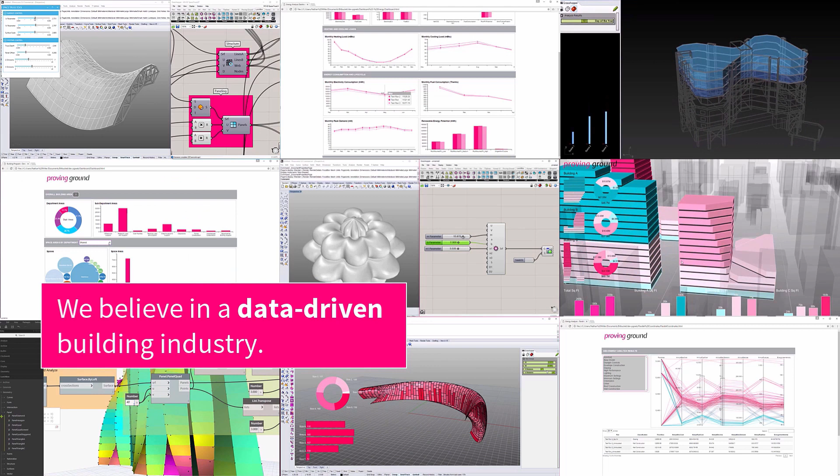This manifests itself through a number of different ways with which we engage with the building industry. One of the bigger ideas here is that being data driven is more than just having access to data or leveraging specific technical workflows. It really speaks to having a methodology and promoting cultural shifts that allow us to think about things through evidence-based workflows and decision-making processes based on the use of data.

And I think that's especially relevant when we think about our topic today with business intelligence. Business intelligence is in many ways a layer on top of various data frameworks that can be used to help drive decisions and actions through insightful uses of analysis and visualization of the data that we have.

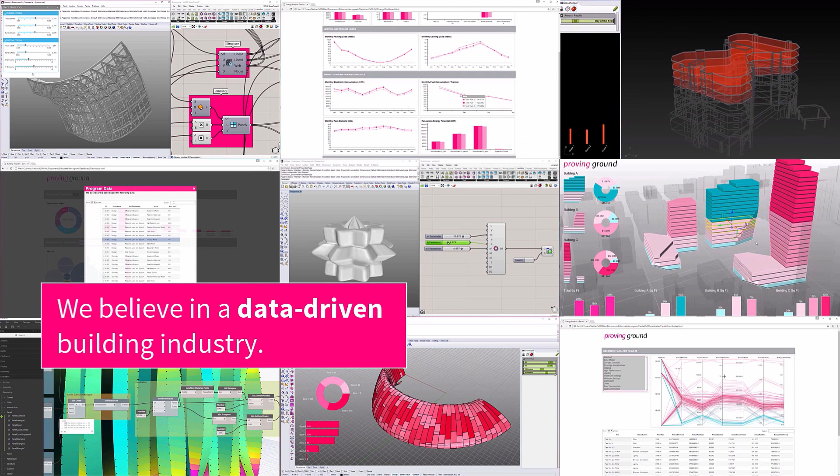But what I thought I would start with is just maybe a bit of a set of observations on data in the world of construction and building and design. It's something that I feel a lot of people talk about in a very abstract sense.

One of the things that we hear from our clients and customers is, hey, we have a lot of data, what can we do with it? Or there might be passing references to, hey, we're using data for X and data for Y. And there is sometimes less of a dialogue about the direct engagement of how the specifics of how data can be put to use. And I think there's a number of reasons for that.

A lot of it has to do with the complexity of our industry. Any given project in the building design and construction industry has multiple sources of data spread across many different forms of representation. Any given project may be dealing with dozens, sometimes hundreds of different data sources at any given point in time. And our tools today are set up to manage data in very localized circumstances.

So when you're building a Revit file, you are in effect authoring data using building information modeling. When you run an analysis of your building using daylight simulation, you're using available data about climate and simulated data to make predictive assumptions of how your building may perform relative to certain criteria. And there's also just the idea of a plan, or a spreadsheet of any kind. These are different forms of data that we're dealing with.

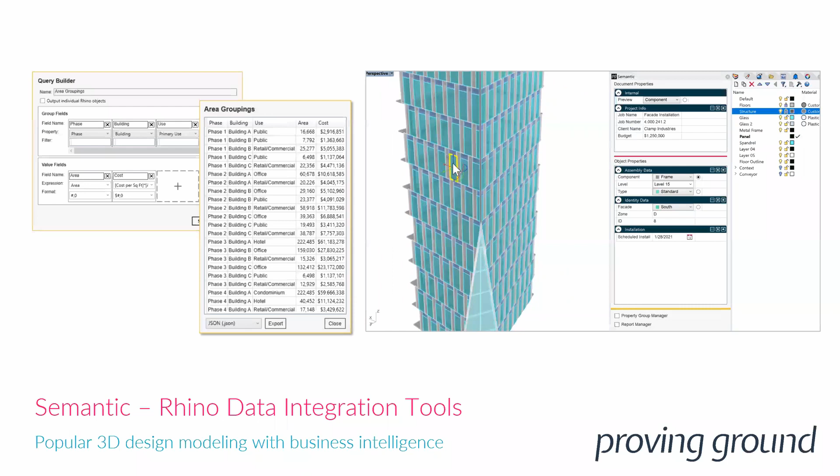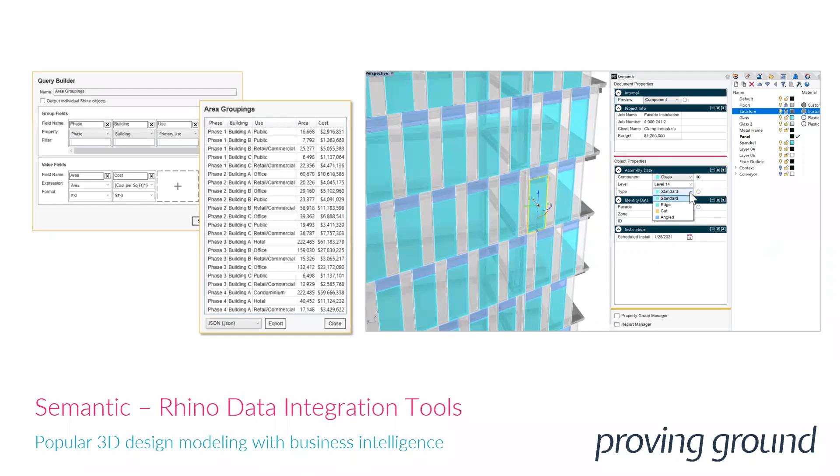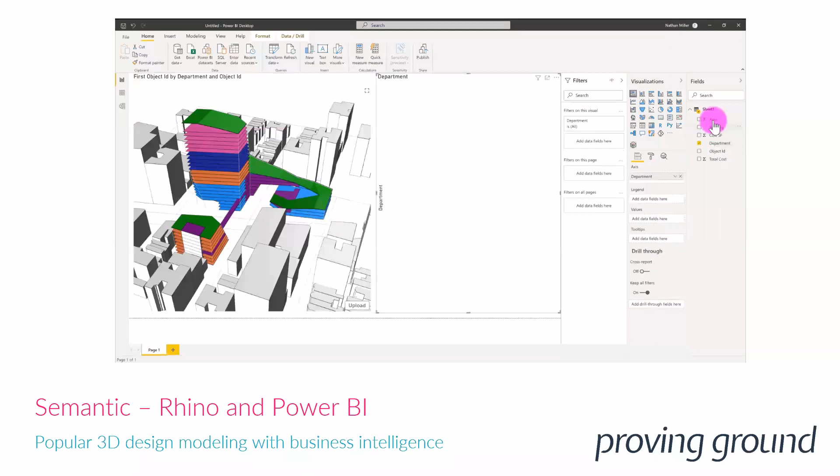Where this becomes interesting for us in the context of business intelligence is that all of a sudden we're thinking about the Rhino file as more than just a model to produce a given deliverable, but thinking about how that model can be used for different forms of analytical and communication purposes. So what you're seeing here is the Power BI environment, using a set of three-dimensional visualization tools, as well as the more out-of-the-box visualization tools by way of pie charts and bar charts.

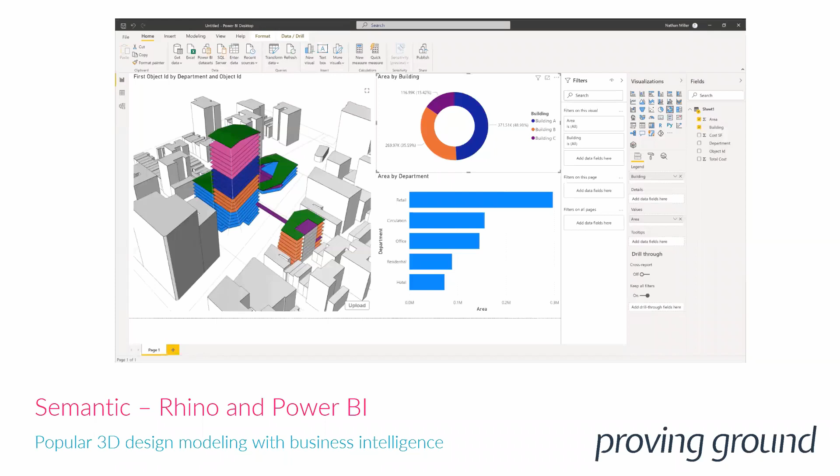We can develop an interactive three-dimensional dashboard that communicates metrics we're interested in understanding, and we're able to do so without having to write a single line of code or HTML to get to the end result. We think that's a pretty powerful idea, the idea that you could go from a conventional modeling paradigm, just modeling surfaces in Rhino, maybe applying some attributes, to then taking the information, tying it into a business intelligence environment, bringing in other data sources as well, composing a dashboard, and then getting to a state where you have something you can share with other stakeholders.

With a very low barrier to entry, in the space of technology, something like that Rhino model that is just a set of surfaces might be transformed and composed into a report that looks like this, where you have a three-dimensional breakdown of surface areas and building program. You can start to get an understanding of different metrics that may be impacting the project, like cost per square foot, or area of building, potential revenue generation.

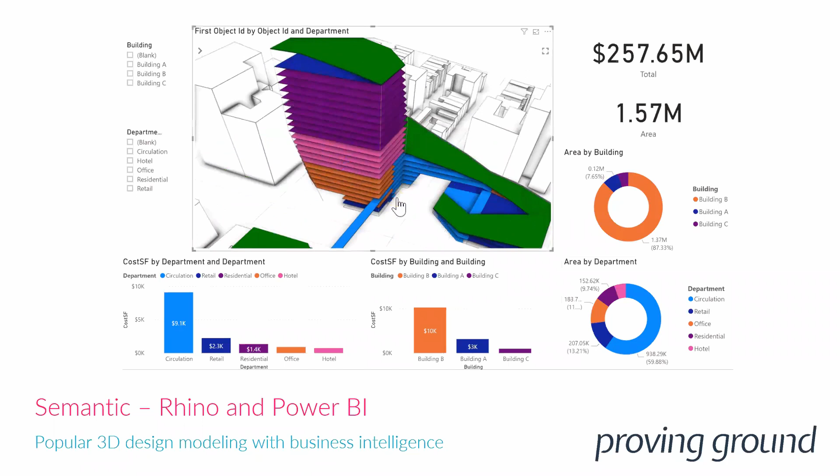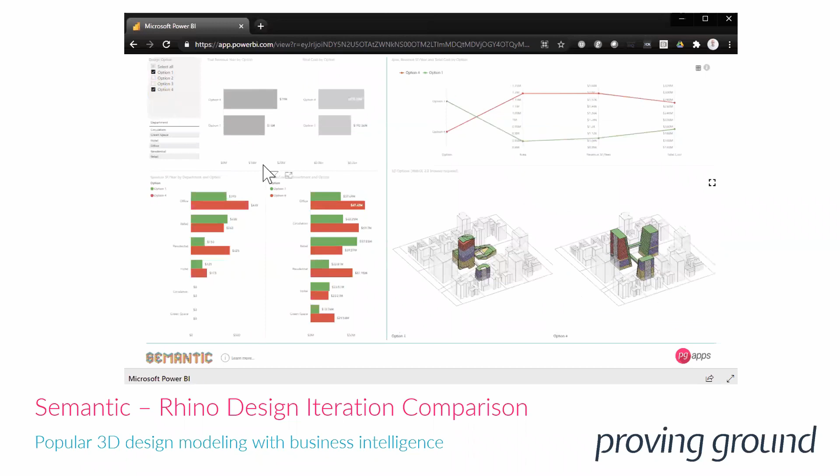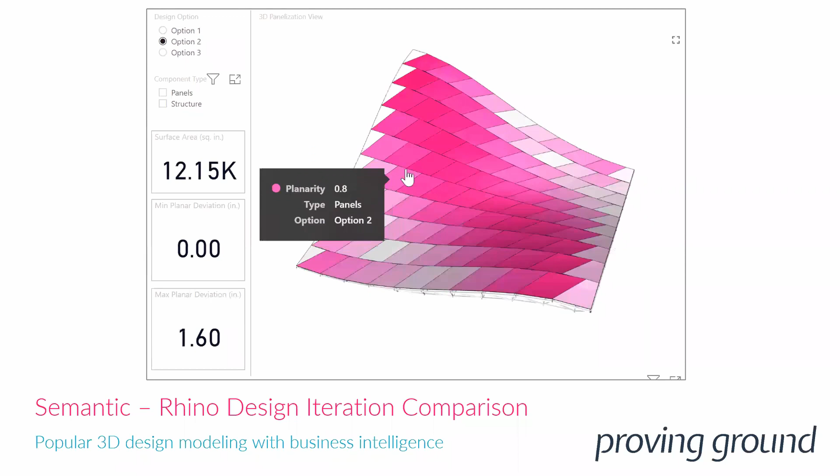We've seen this type of thing applied in the space of more fabrication-level building systems, complex geometry. This is a sketch I put together for these types of presentations that looks at a parametric truss structure, with three options generated, color gradients suggestive of panel flatness. We're able to get an understanding of the composition of these elements, again in a web-viewable formatted dashboard that tells that specific story.

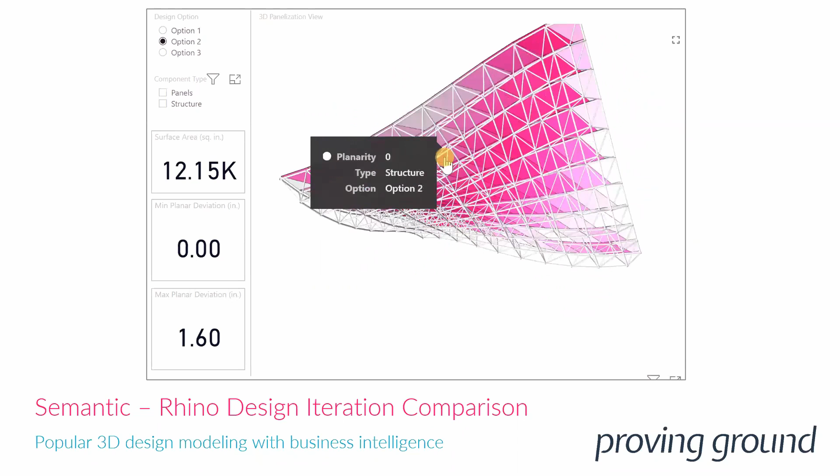There's other kind of applications for this that maybe even go beyond our particular domain and expertise. And those that know me well know that I'm a huge nerd, and I have a hobby in the space of 3D printing.

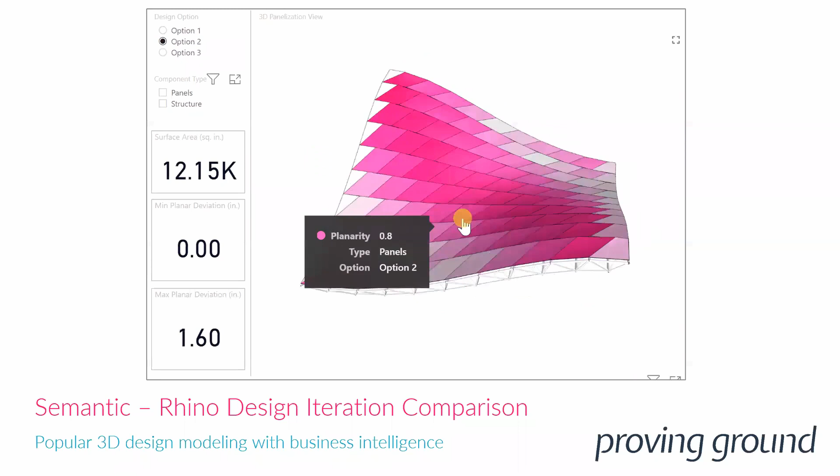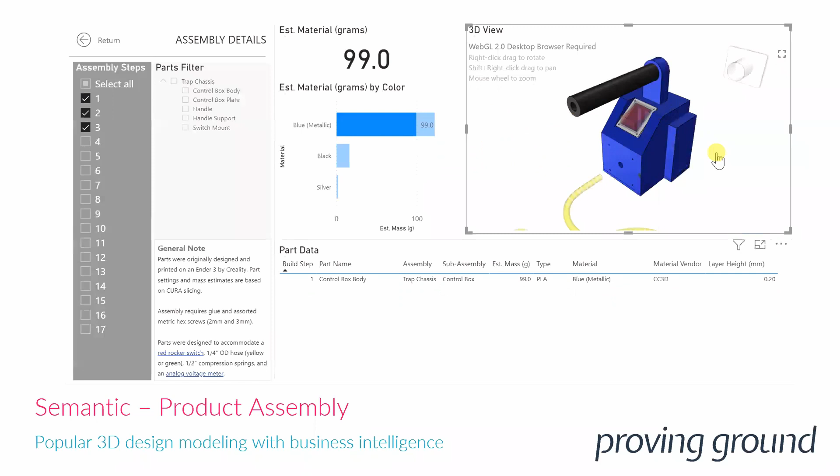So for anyone out there familiar with prop making and classic movies from the 80s, you may recognize this particular toy from an 80s movie. I certainly had this toy as a kid growing up. This is the Ghost Trap from the famous Ghostbusters franchise. I'm really into 3D printing, and I make stuff for myself and my kid all the time.

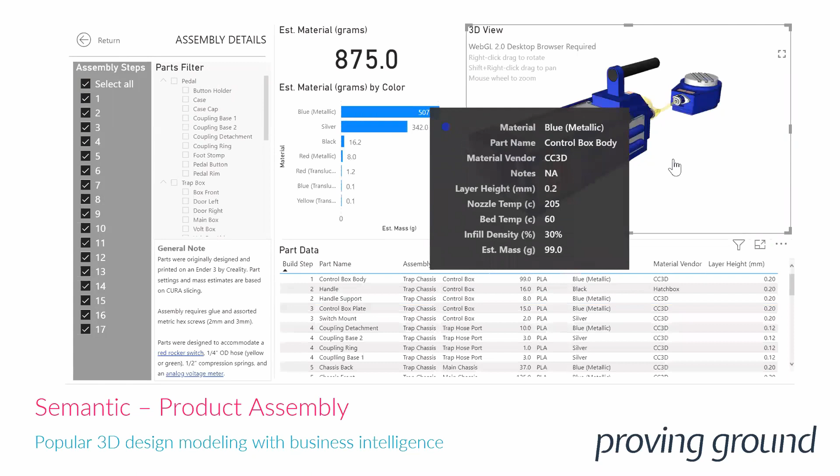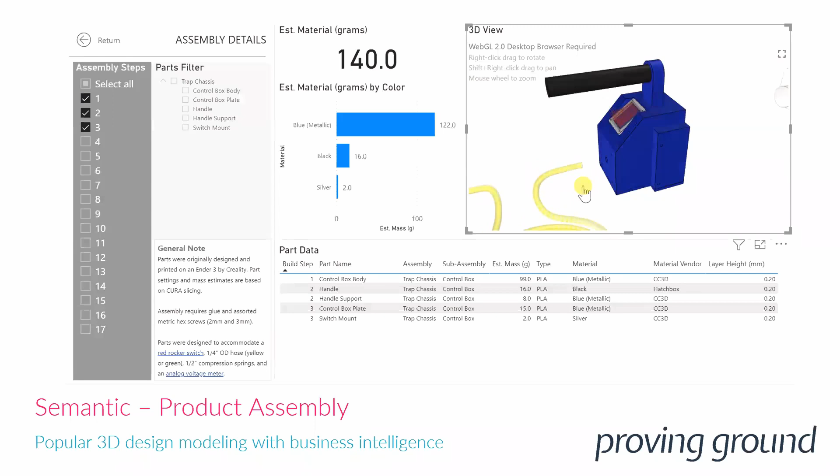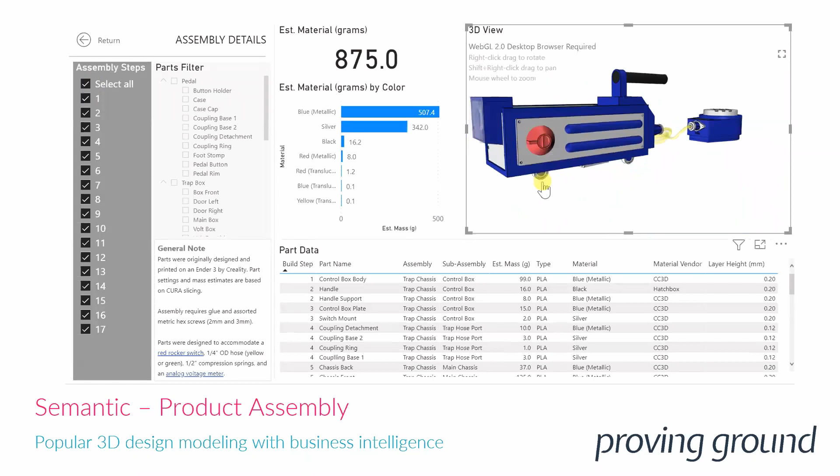This is a 3D printable set of files organized in Power BI, showing breakdowns of component parts and assemblies, as well as information about the particular 3D printable material being used, the layer heights being used by the 3D printer, and then a set of instructional steps that can guide you through the composition and build of one of these props. Taking us away from architecture for a minute, but showing something suggestive of potential workflows and uses here at a conceptual level.

So I wanted to now step into the space of, if that's the conceptual realm or early stage development, or the freeform geometry realm of 3D modeling and representation, what we can also observe in the building industry is that one of the central sources of data that we work with day in and day out as professionals is building information modeling. So as professionals, based even across different platforms and tools, you are authoring and composing more likely than not some aspect of BIM.

You might be in Revit doing planning, you might be in a place like Tekla doing steel detailing, you might be in ArchiCAD, et cetera. Revit at this point in time is obviously one of those tools that is extremely widely adopted, especially in North America. We wanted to really look at ways with which we could equip users of Revit with ways of harvesting their information, both at a data level, but then also at a 2D and 3D level, and have that data represented in a business intelligence environment like Power BI.

So the workflow that we have here is mostly about how do you translate a Revit file into a data source. Power BI isn't going to read your Revit file directly, right? You have to get the data out in a way that a tool like Power BI can connect to it. There's an aspect of this where we've invested quite a bit of time and energy into creating harvesters that let us take these industry file formats and put them into open database modes of representation.

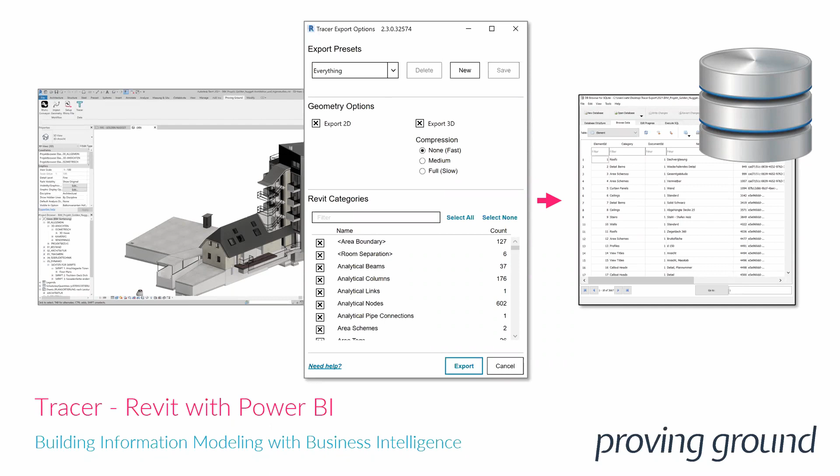So one of the things that Tracer out of the box does with this toolkit is it takes your Revit document and composes an SQLite database. Using open database connectivity paradigms with Power BI, you can connect to that database and read in different attributes about your project, about the geometry, about various parameters, and so on.

So what that results in is this ability to connect into a building information model as you would an Excel file, or a CSV or JSON file in Power BI. Using the drag and drop interface and visualization tools we've authored, we can display the information right out of the data source and have it dynamically generated within a dashboard environment.

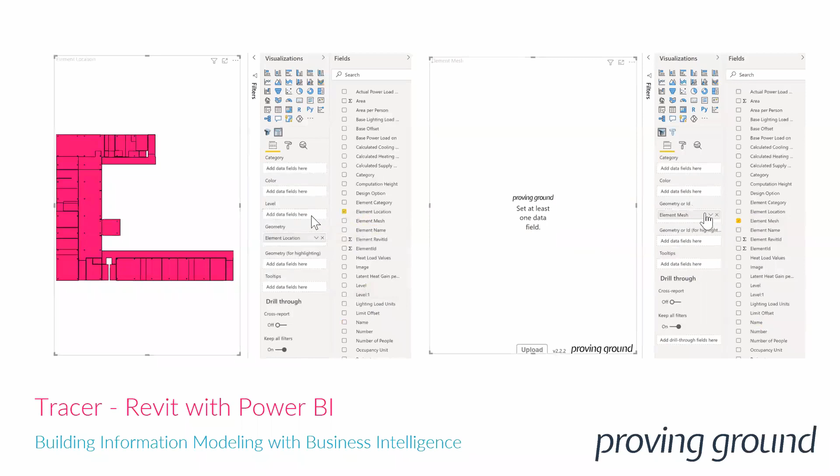There are two visuals here. One is a two-dimensional vectorized visual looking at spatial boundary information, generating a view through the drag and drop allocation of fields. Then using the same data source, we're dragging and dropping three-dimensional mesh geometry onto the dashboard as well.

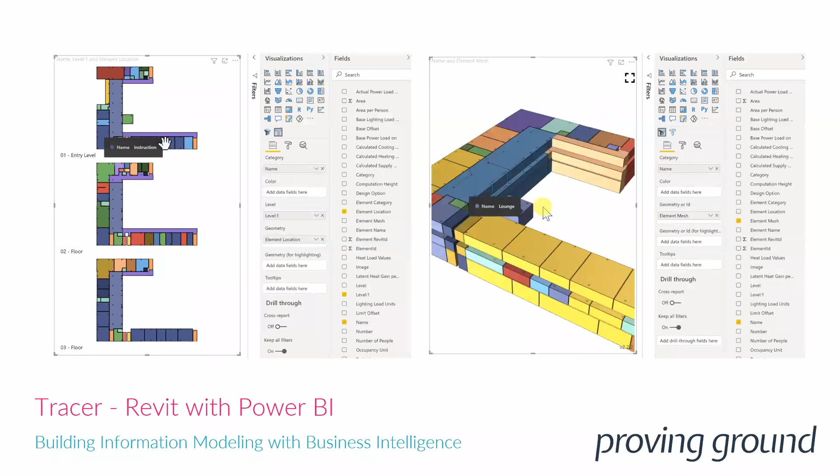All of this is happening, I guess, on the client side. What I mean is we're not relying on any third-party or subscription service like BIM 360 or Forge to accomplish this. This is all being composed in the user's environment as a standalone workflow, which we think is pretty important to consider, depending on your objective.

We can extend this concept into three-dimensional representation. Again taking the idea of space, this is a sample model that comes with Revit, harvested in the context of Power BI through the Tracer toolkit. Here you can see a set of three-dimensional volumes being represented with square areas depicted in a dashboard context. So it can go beyond 2D into a 3D mode of understanding the digital asset.

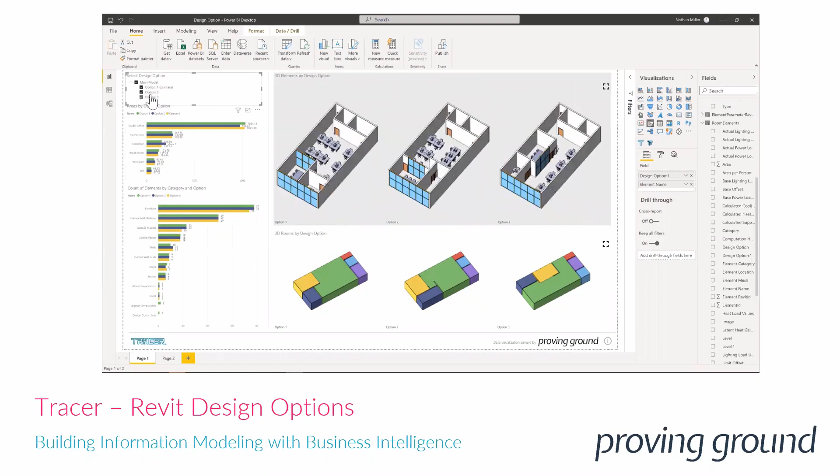The three-dimensional access of content is itself a very valid use case. It's a question that's come up on the owner-operator side, as well as from architects dealing with some level of three-dimensional content analysis in their model.

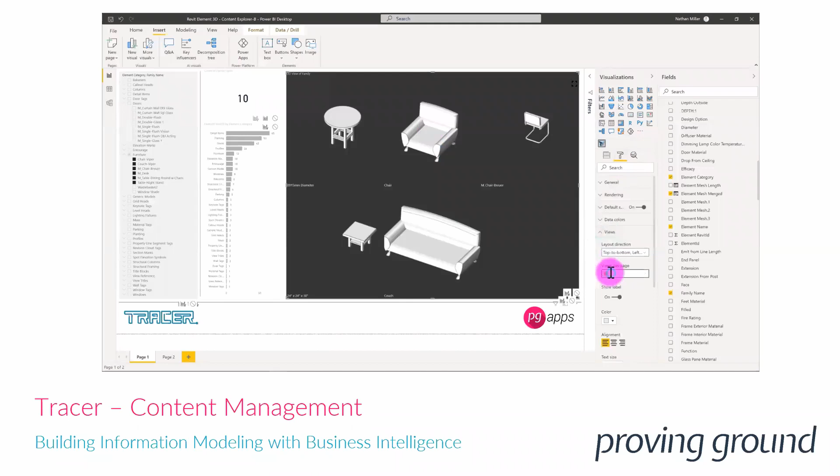This is a Power BI dashboard using harvested model information to visualize and create a content explorer. We're able to drill down into specific digital assets, pull their parameters, their three-dimensional information, quantities, and so on out of the model, and start to navigate it.

Then there's this idea that the data within these building information models may need to be correlated and connected to other sources, like scheduling information, costing information, on the construction end of the spectrum. This is again using the same set of tools, Tracer and harvested Revit data. We have a three-dimensional model of a building.

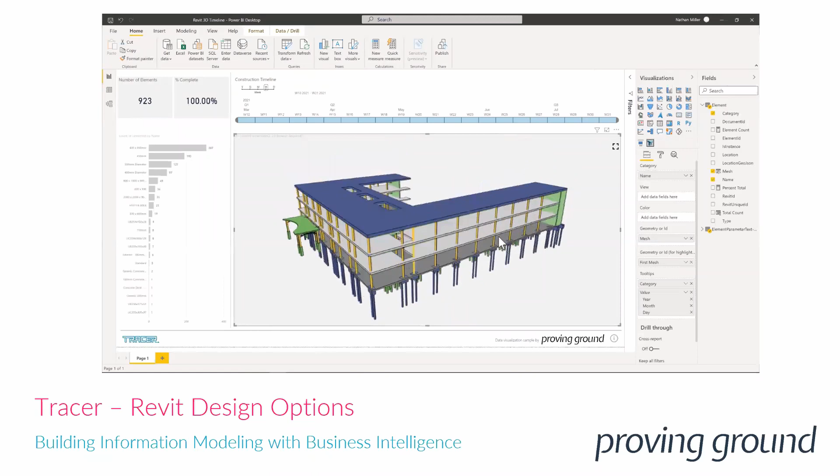These elements are tied in with a database related to their timeline of projected construction schedule, and we're using a Power BI visual for slicing through a timeline to show potential progress of a construction job. This is obviously a conceptual example, but the idea is: we have a three-dimensional digital asset, we can tie it to information about time, and then use the tools available in business intelligence to correlate those assets and bring them together to provide a view and start to tell a story.

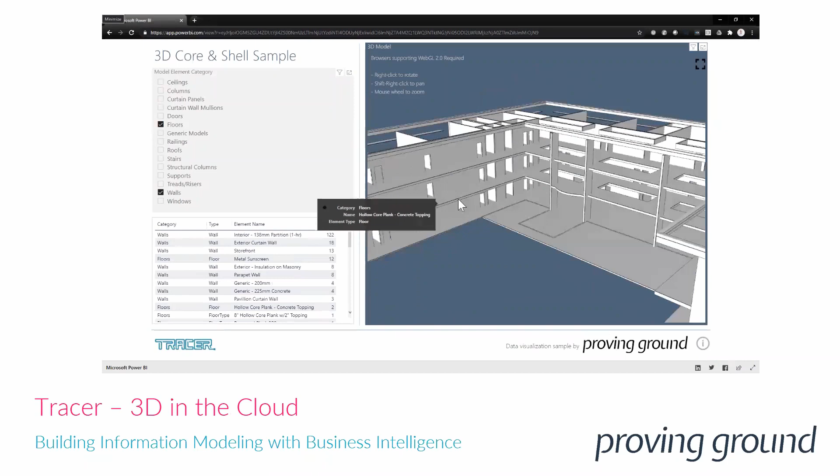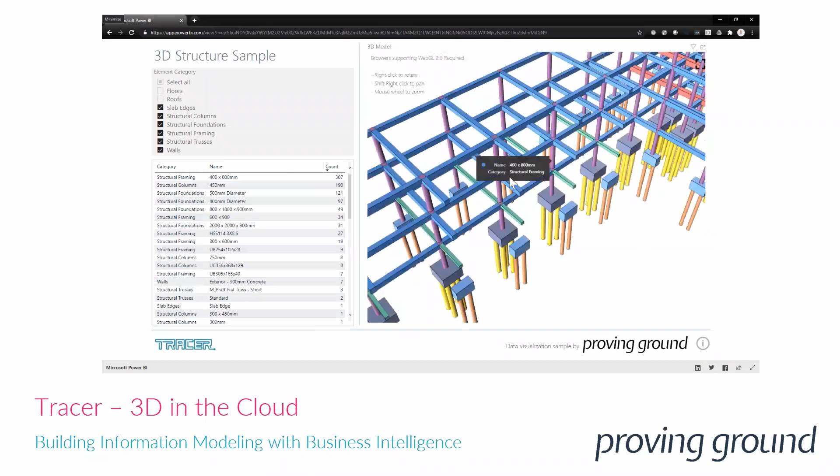These use cases are numerous. We have this ability to compose dashboards, tell a story based on the need of the project, and articulate a use case that can deliver value in its own context at a given moment in time. These are meant to be flexible tools, not prescriptive, not just showing us one view of information. By building these tool sets out for tools like Power BI, you can connect into a number of different things and present the information that someone in a specific discipline, or a project manager, might be interested in. It becomes another way of composing your story with the information.

I'm going to pause here, and maybe if there are some questions we can talk about before I get into some of the opportunities we are seeing beyond this specific tool set, and some of the current research we're doing on how business intelligence may be leveraged and involved in our world and our space in the future.

So Steve, if you would moderate. Yeah, well, so we have a couple of questions about file types. There's a lot of interest in IFC, ArchiCAD, and Autodesk Assemble, and whether we have any plans for those platforms.

Good, that's going to be the next section, so I'll talk about that. Oh boy, exciting. Next, great, let's see here.

Someone asked if you were a Ghostbuster. Am I a Ghostbuster? Are you? Can we call you if we encounter a ghost? Who are you going to call? Proving Ground — we're going to call Nate Miller.

We had some questions about limitations in terms of performance and model size. Yep, that's a really good question. I think some of the examples I'll be showing can start to address that a little bit. Just last night, I was working with a Tekla model in our viewer with a great deal of success.

Obviously, we're dealing with a visual sitting inside of Power BI, and we ourselves are always looking to optimize our visual's performance. But last night, I was pleasantly surprised to have thousands of beams with nuts, bolts, and weld lines being represented inside of the Power BI environment.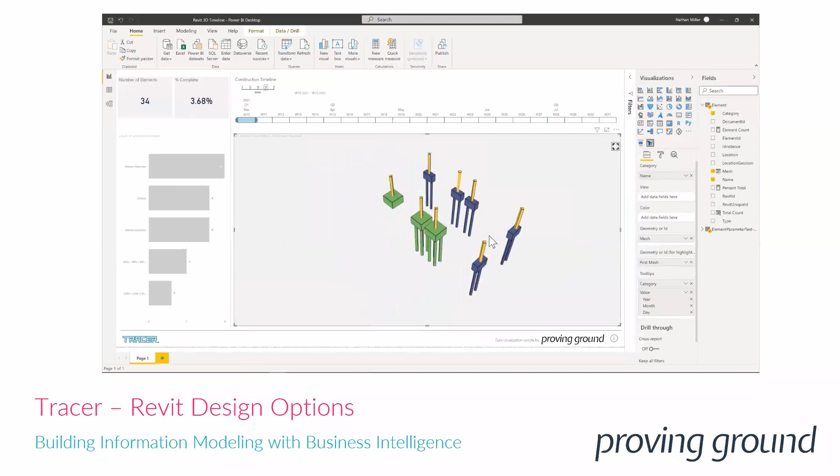So what's happening here is within Power BI, the model and all the elements are there, and the construction timeline visual, which is a timelining tool, is filtering the elements based on the date. We've made a join between information about time and information about elements, and Power BI handles the rest - it's able to say, okay, now you're filtering based on this attribute.

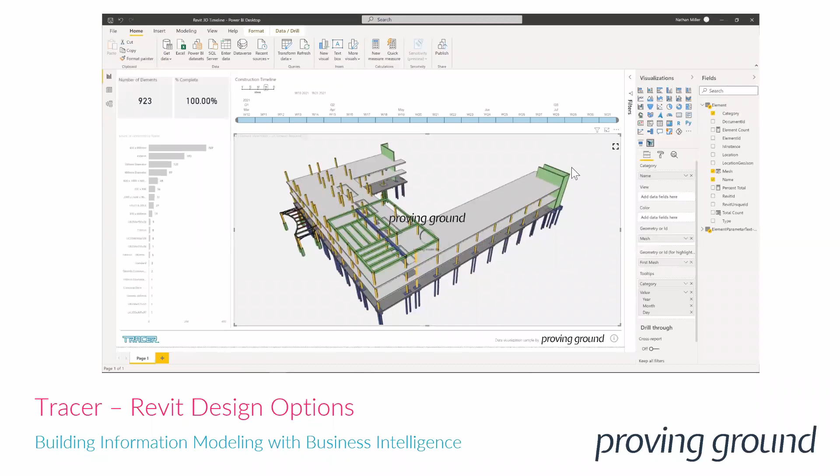Great, let's chat about the opportunities and we'll see what other questions come our way. So on the opportunities, some of the things we're looking at relate to questions that have already come up, and questions that come up pretty frequently.

The stuff that we've put out there and published that you can download today really is about standalone workflows that you can leverage on your desktop and compose within your ecosystem of Power BI, publishing to the web, Revit, and so on. They don't rely on external systems or infrastructure.

But what we have implemented and deployed at enterprise levels is this idea of positioning building information models and other related sources in a kind of data warehouse context. So it's no longer about model-to-model on-demand harvesting and visualization, but about infrastructure and systems that allow multitudes of documents and models to exist in a common data source related to other data sources such as project management, cost, and so on, in a warehouse environment that can be accessed by business intelligence.

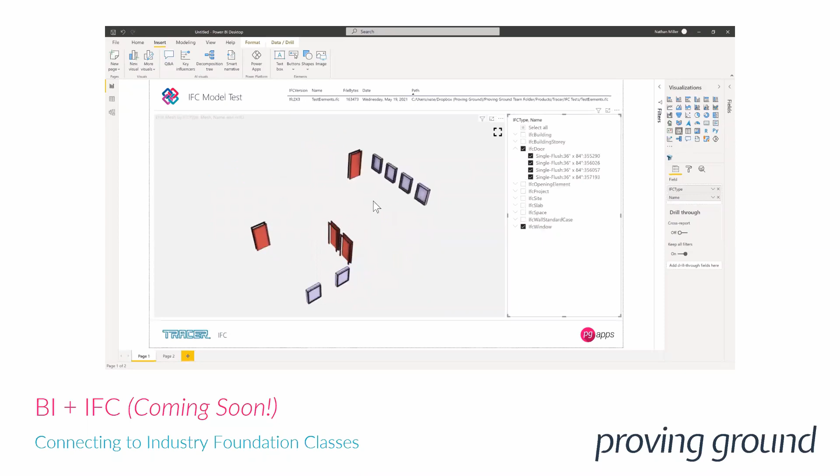More recently - I think this is new as of this week - a bit of personal R&D on my side, building upon a lot of the research and development done by the Proving Ground team, we've been talking about what it means to support file formats like IFC in this workflow, and can we leverage these open BIM standards the same way we're harvesting Revit information, which opens us up to supporting data coming from ArchiCAD, Vectorworks, Tekla, and so on.

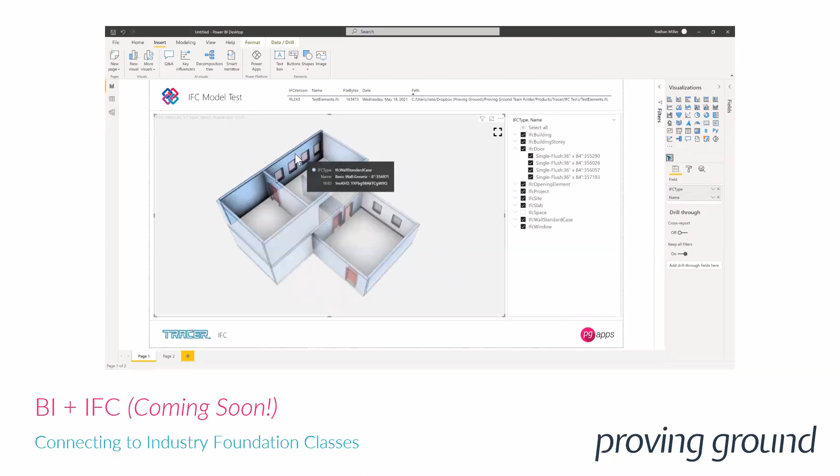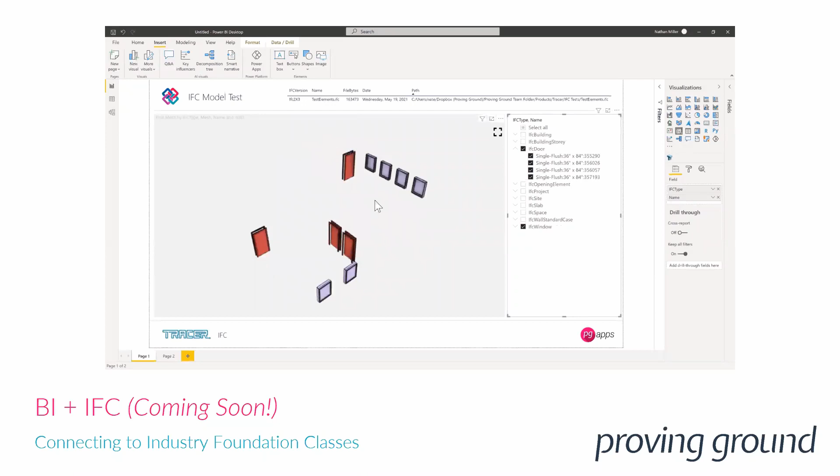So this video is a very simple thing I posted yesterday - just a handful of wall elements, floor elements, door elements. These are composed in an IFC file with IFC classifications and data properties, visualized using the same tracer visual that's being used to visualize Revit data. We're now looking at the composition of IFC as a data source.

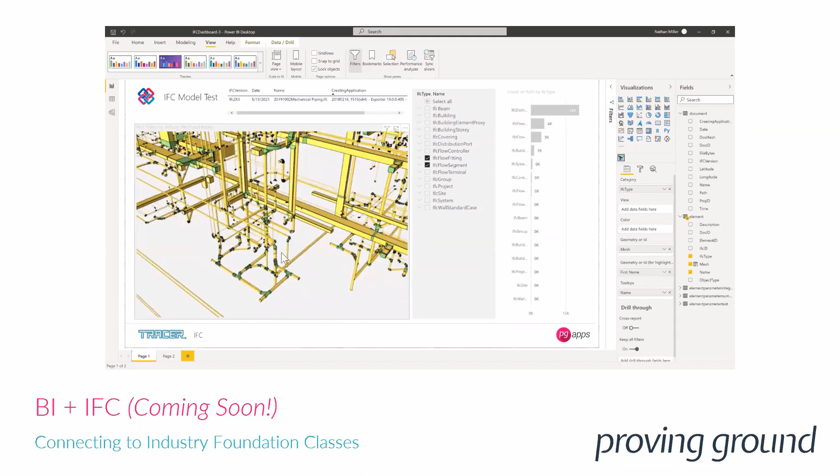This has been very promising in a short amount of time. We found a couple of crazy sample files online that have IFC elements - this is a mechanical system model we recently tested and pushed through the workflow. The study escalated really quickly, from a handful of doors and walls to an entire mechanical system being visualized in the Power BI workflow, again with the ability to connect it into other data sources.

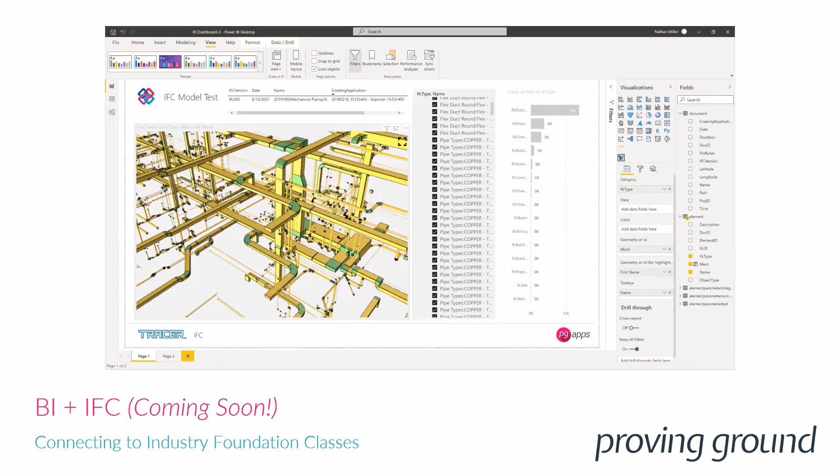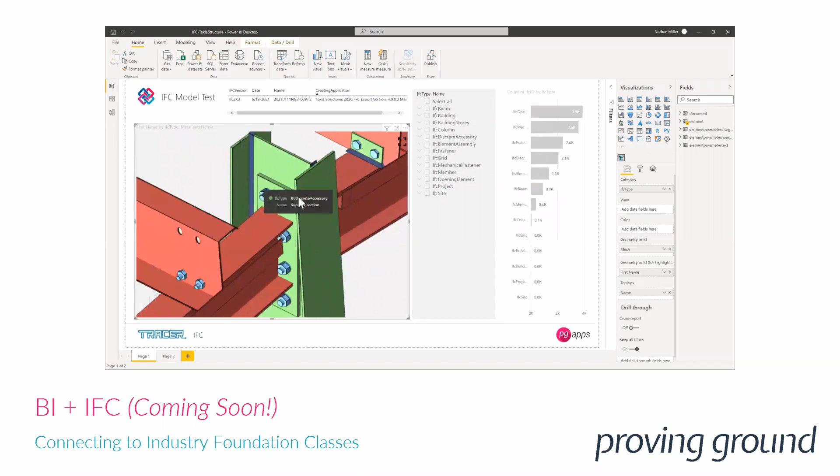So here you have the element and parameter records and a three-dimensional visualization of the model existing in the Power BI environment. Then to further stress-test this, we pushed in a Tekla Structures model that was generated from Tekla to IFC, and zooming in you have all the steel detailing being represented in your Power BI dashboard.

With all the benefits of having the digital record there and accessible within Power BI, you can start to create visualizations. It starts to speak to quantity of elements, and if there's information about materials or other parameters relating to quantification of elements, all of that becomes exposed as any other data source would be within the Power BI environment.

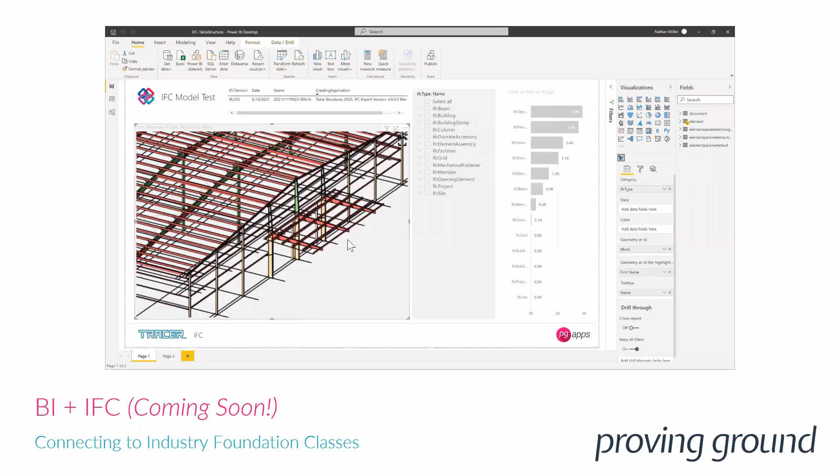Again, this idea that we really start to use our technology with the business intelligence environment to support these open file formats really starts to cast a wider net over potential use cases for combining three-dimensional data that the construction industry uses with this overarching layer of business intelligence that's built to connect to multiple data systems.

I wanted to end on the opportunity section, just looking at this overarching theme of predictive modeling. In the business intelligence sense, you're really giving the user this opportunity to connect to data, look at trends as a human, and understand the data in different and meaningful ways.

One of our projects, a multi-year project where we tangentially work in this space finding different use cases, is in machine learning. One of the central theses of our work is that concepts like machine learning and AI have success predicated on the availability of well-structured, well-curated data. If I go back to some of the initial observations about data sources and different forms of ownership, and the way projects are conducted and created, our data as an industry is extremely messy.

But what we see as an opportunity is, if we're able to really leverage these data sources and get more eyes on the information and study it in a way that allows us to curate well-structured data sets reliably through reporting mechanisms, we cast a wider net on people able to participate in this space. Then perhaps we can start to use a building information model database as training data to make predictions.

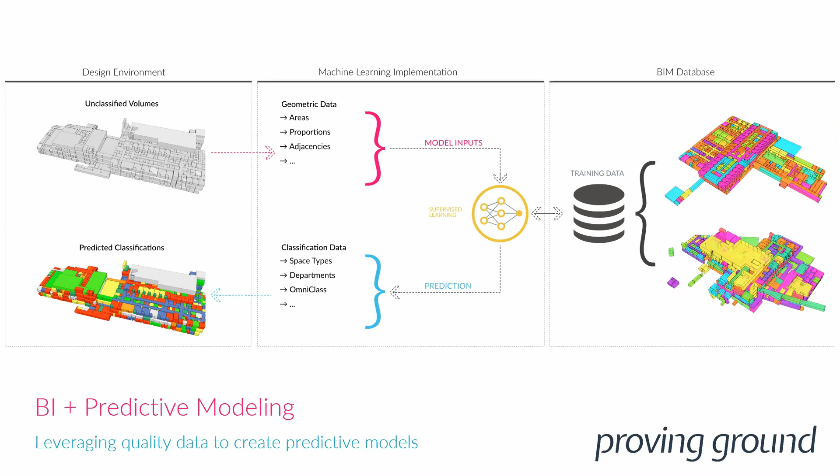But there's also this idea that if we're able to capture information in this data format, can we start to leverage building information to make predictions that might impact design? In one area, we took a selection of 100 floor plans and trained a machine learning algorithm on different attributes about these floor plans, and now, given a set of inputs and requirements, we can generate and predict a given layout.

This type of work is being done pretty broadly at this point - there's a lot of different technology groups and research happening in this space. But again, this idea that if we're able to provide frameworks that allow for this sort of data curation to occur about space and its attributes, and have it be reliably structured, it opens up opportunities for automation that didn't previously exist.

But at the end of the day, what we're about here ultimately is connecting designers and builders with their data - because we believe there's an opportunity to create a better built environment by reliably structuring our information, connecting to different information, seeing our data in a different way, and drawing correlations we may be unaware of to make better decisions. That's our aim here as an overarching theme.